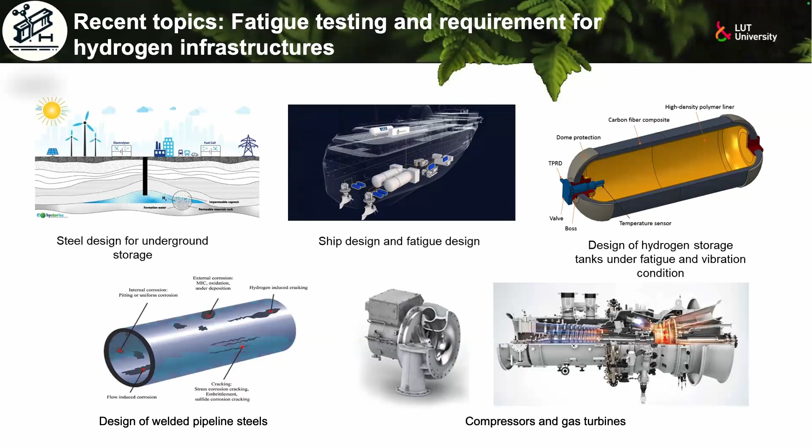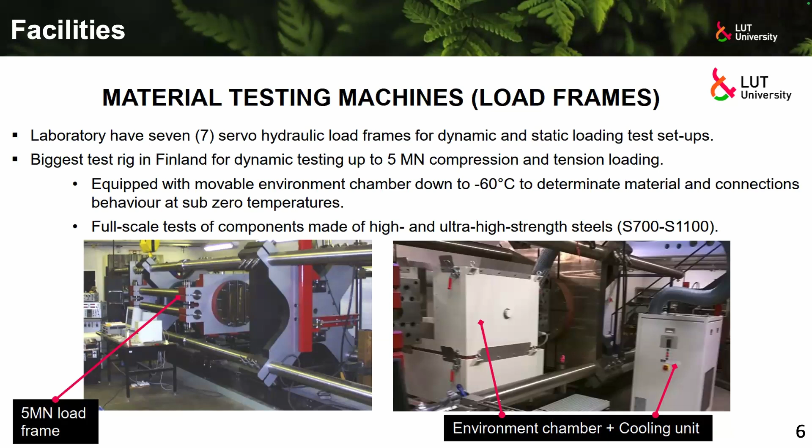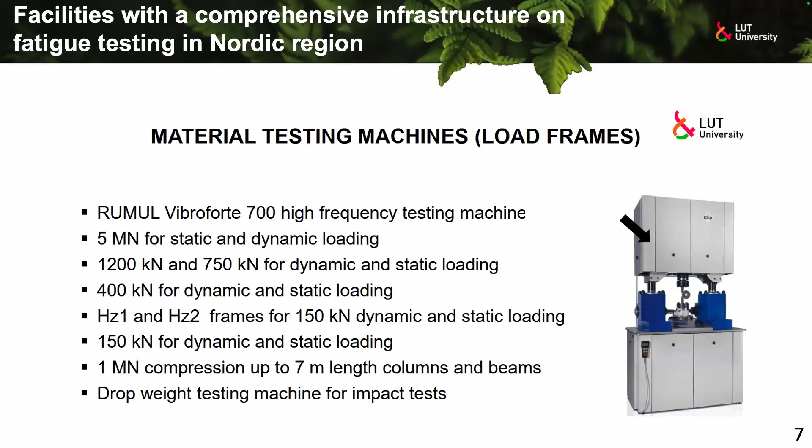I have already shown our current instrumentation for testing, so I can skip it, but we have a big range of ability to test different materials at different stress levels. Regarding fatigue testing approaches, as in some of the presentations today and yesterday, we have big interest in testing materials in different conditions depending on the application.

For example, high frequency fatigue testing is something we are recently approaching as a new method that can reduce our work. I think the RUMUL company is also here, and they manufacture this device for us. Low cycle fatigue testing is another possibility that we are using for testing different materials. This can also be a faster test, but it can rank the materials against the regular experiment if you want to do that.

But the popular one, which also had some presentations, is fracture mechanics testing, which we can break into several types. I stress a little bit here the J-integral test. We also have hydrogen assisted crack growth rate testing, LEFM, the most popular one, with some presentation results related to that. We can see the crack growth rates depending on the number of cycles, and how the delta K stress intensity factor can change.

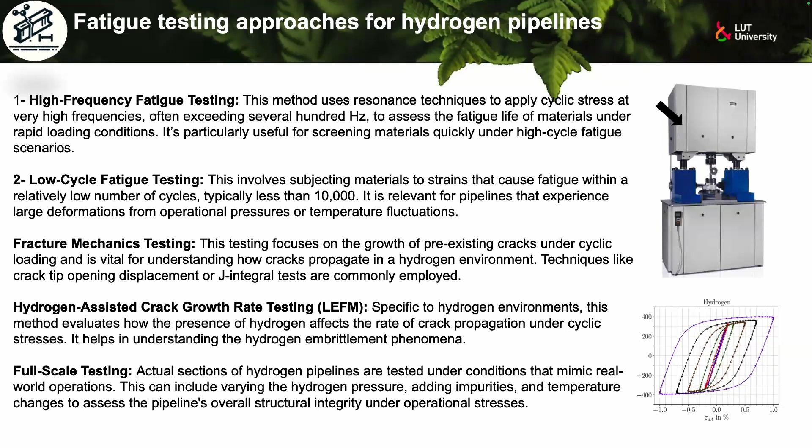For the setup we have, other than the regular setup I have shown you, we test different specimens at different cycles with the dog bone specimen that you can see here, and we can predict how the fatigue life changes. Meanwhile, we can also follow the change of temperature and the work introduced by plasticity or friction. Then we can get a lot of information about entropy generation, which we already published in this paper, where we explained this heat mechanism.

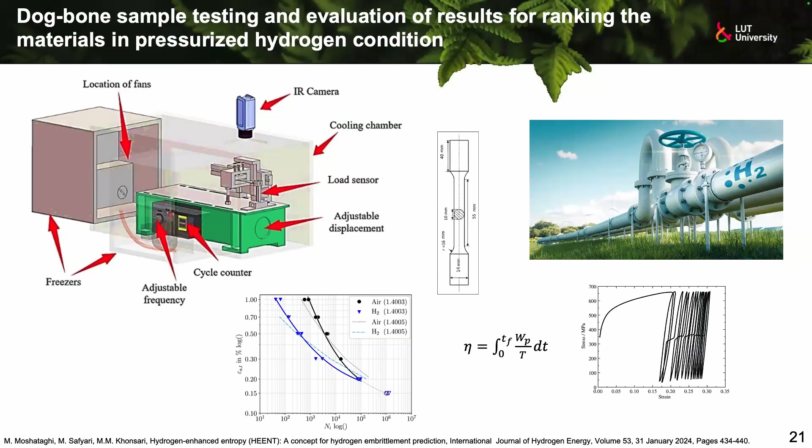But then we want to see one of the cases where we used linear elastic fracture mechanics, and how we can finally use it for the design and testing of hydrogen pipelines, which is a very important point we are looking at.

This is part of the hydrogen and carbon value chain project in Finland that is now approaching the final phase, and we could provide some new measurement methods and also establishment of a prediction model for this case. The main indicator, as you know, in pipelines is pressure fluctuation. This pressure fluctuation is provided by pumping, and this can provide a very low frequency of stress, and you will expect a very low frequency with probably a very high number of cycles.

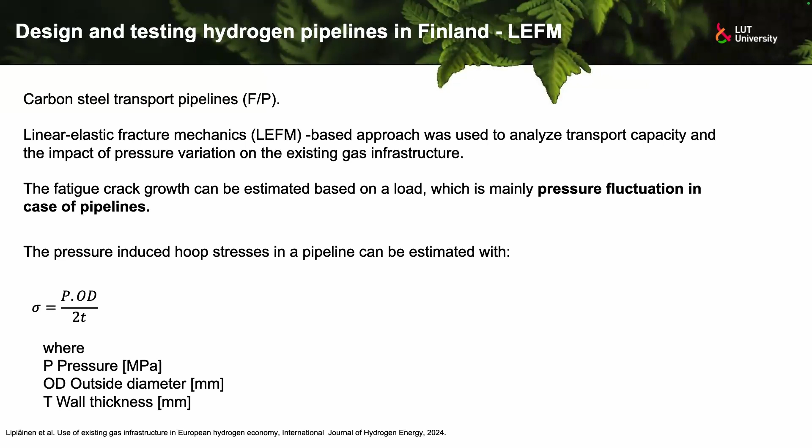The stress here is also explained and evaluated. More calculation data and details can be found in this paper published in the International Journal of Hydrogen Energy this year. For the purpose of this study, we finally have to connect these results with another approach that we need to complement with the weld, because we felt at the end of this project that testing of the weld is also very important in this case.

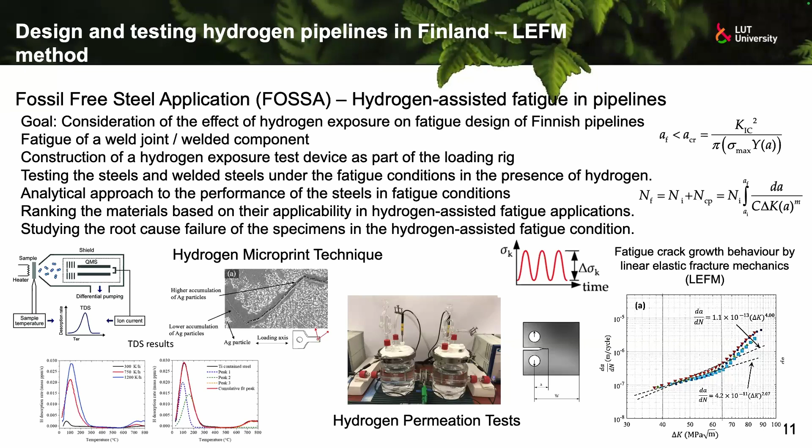Like the other presentation we have tomorrow from another postdoc in my research group, he will present the accommodation of all this data together, comparing them with different steel pipelines, and also trying to use AI for evaluating those data.

For that purpose, as you know, when we reach some values like the K1C, we can calculate that based on the stress intensity factor that we can measure. Finally, there is also a number provided by standards like ASME B31.12 that you can see here, so we have this specific number with this crack growth. I think this is also bound with the previous test that Tigras presented.

The point is how this crack size can be relevant and pointed to its standard. From my viewpoint, this standard gives a very open criteria, and there are lots of materials that can sit inside it. But while we are testing them in real conditions, as I think Chris also mentioned, some of these materials will not actually work in the long term. So this criteria is somehow very open.

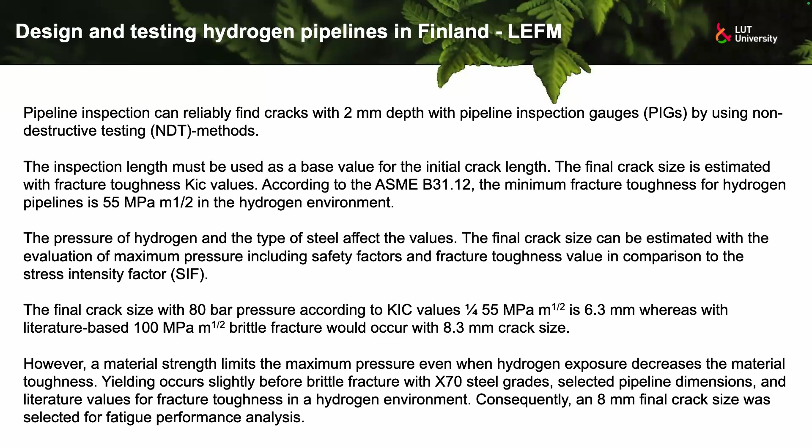But absolutely, we are trying first to see how we can approximate these linear elastic fracture mechanics results. If you want to break down the data from the crack growth rate, we can see that we can approach this with the one-stage Paris law. That is similar to what all mechanical engineers know.

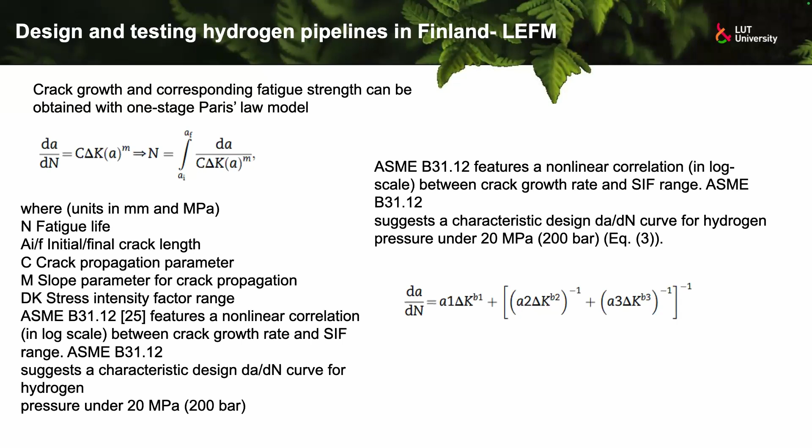But if you want to reach further, we suggested this two-stage variation of that. In that case we can see here two parts based on the stress intensity factor, and we can make this prediction much more viable. Based on our database and the evaluation here, we can see how phase 1 and phase 2 can be calculated based on this numerical model that we can fit to our real data.

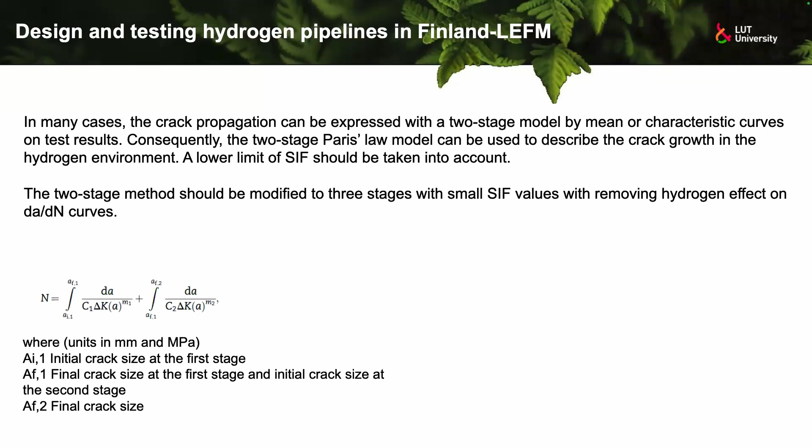Okay, then this fitting will also consider the finite element calculation, so that we can see how much stress we have at the peak and also at the tip of the crack, and also we can see how the crack will be extended and also controlled based on the distribution of the stress around it.

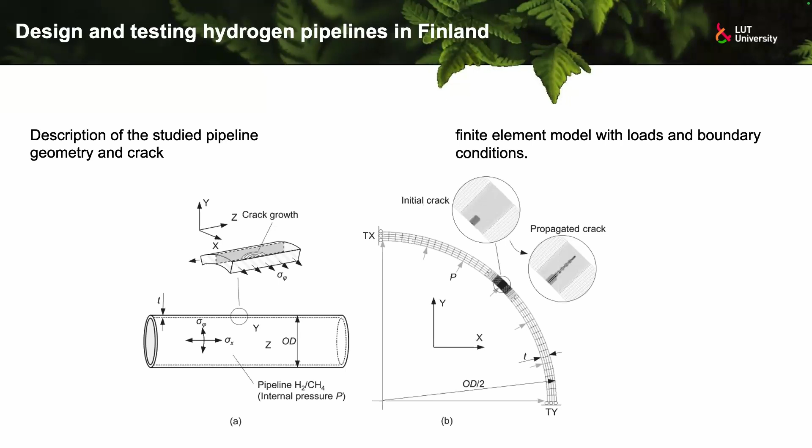And then after all these considerations, we could reach this schematic that you can see here, a little bit like a general guideline for industries, because the project is related to the industries, and then how we can rank them and also show which part and which specific properties of the material can be important.

But then absolutely the main point here after our model that we can see here is the initial crack size in the pipeline. That is super important. When we want to discuss these current existing pipelines, then we need to look at that. But absolutely, there are lots of questions about that. Okay, what is the criteria for that, or how we can bring that to good inspection by these different NDT methods.

Then the important part here can be these fracture toughness topics and also material to withstand. And also between them, we have these different variations. That is also the growth rate of the crack. That is also a very important one.

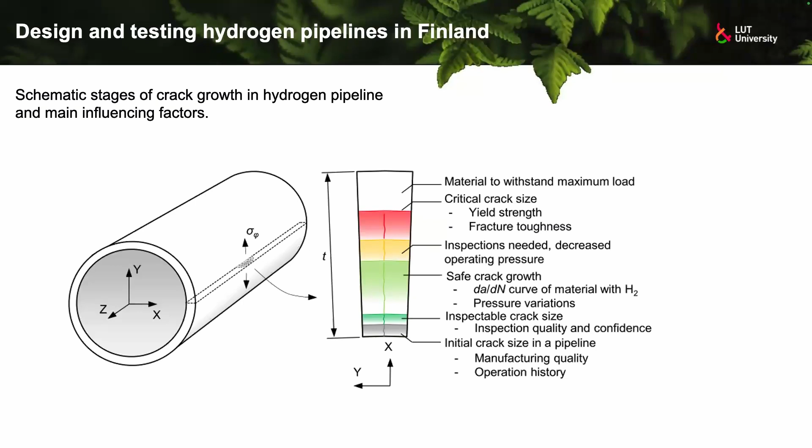And then, as you can see, that is the industrial inspection method or consideration where we try to simplify our output. But it doesn't mean that we could give the green light to use all this existing pipeline. And then the main thing is to try to monitor how the industries are doing their things.

And also the output of our data is here, where we can see the fatigue life as a function of pressure, in a specific size of the pipeline that you can see here. And also we have the pressure cycles here, and also the pressure range. Also, we consider the mixture of methane here, which is coming from some of the tests that we did in the gas mixture of H2 plus methane. That is also very important.

But then the lines that you can see here show us how the different criteria work, and also how we have different prediction methods like this two-stage method that I mentioned, and also the regular estimate. Now here we can see that the fatigue life considered a reasonable one is not easy to meet in different ranges of pressure, especially in higher. And here our two-stage method is working much better than this regular estimate.

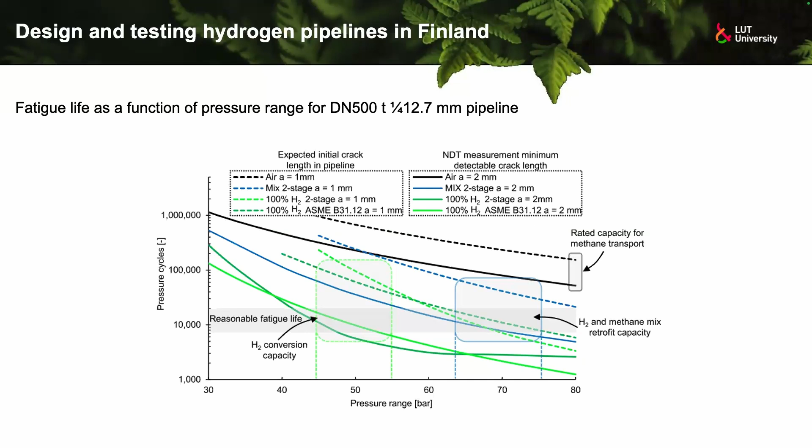And then I think in that case, we need to also consider the replacement or correction of this standard in future. However, I can admit and also comment that at the moment, even if we have another revision of this ASME standard, it cannot be easily applied directly, because we are lacking a little behind on the required data for the purpose of this study. And then the final message of